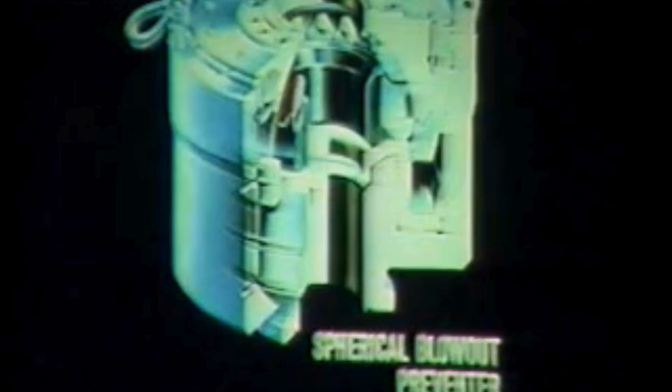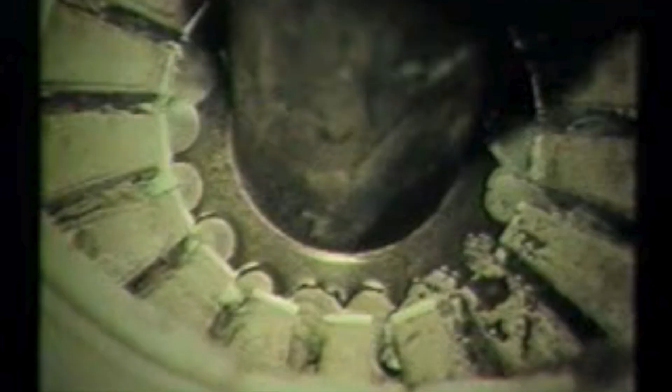The spherical blowout preventer, which is positioned at the top of the BOP stack, is the first preventer you should activate in an emergency. First developed by Shaffer in 1971, it is designed to stop a blowout under almost any circumstances. A spherical blowout preventer will seal automatically around any shape or size: kellys, drill pipe of all sizes, tool joints, drill collars, casing, wireline, even an open hole. The spherical BOP automatically adjusts its closure to fit whatever is in the hole.

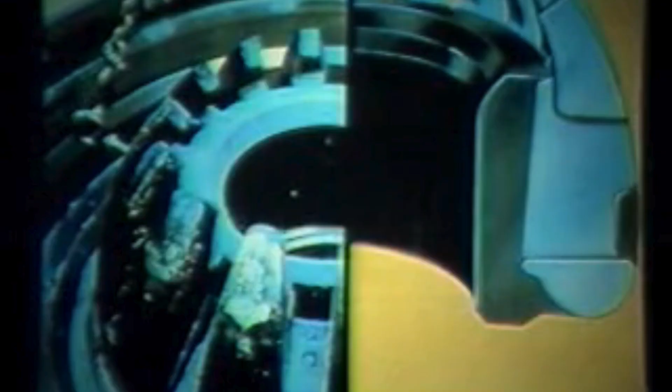The sealing element in a spherical blowout preventer resembles a large sphere-shaped jaw. The teeth in the jaw are individual steel reinforcing segments that form a skeleton for the circular rubber portion of the sealing element. The preventer is activated hydraulically.

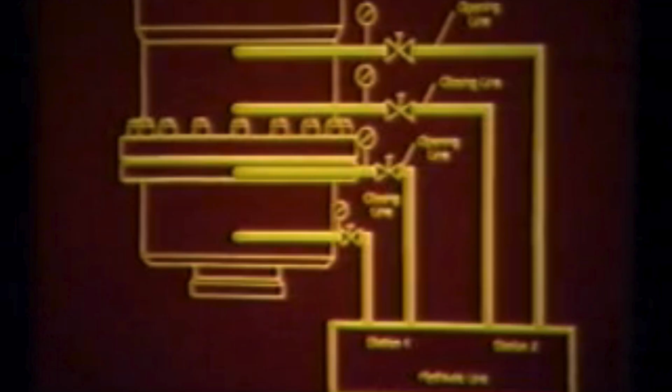When hydraulic fluid is pumped into a chamber below the piston, it forces the piston upward against the bottom of the sealing element. That pressure in turn causes the entire sealing element to move upward. Because the element is shaped like a sphere, the upward movement causes the sealing element and the steel segments to move into the well bore until they seal against the drill string, or, in the case of an open hole, against each other.

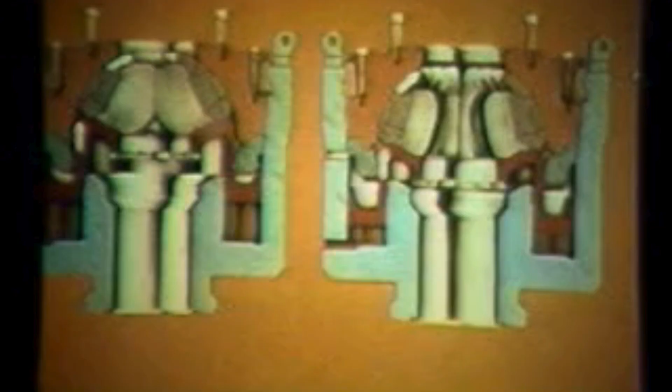N.L. Shaffer spherical blowout preventers are available with either bolted or wedge covers. The smaller BOPs and those with lower working pressures are built with bolted covers and are painted blue. Larger BOPs and those with higher working pressures are designed with wedge covers and are painted white. In bolted cover models, the upper housing fastens to the lower housing with studs and nuts. Wedge cover models fasten with locking segments and a locking ring.

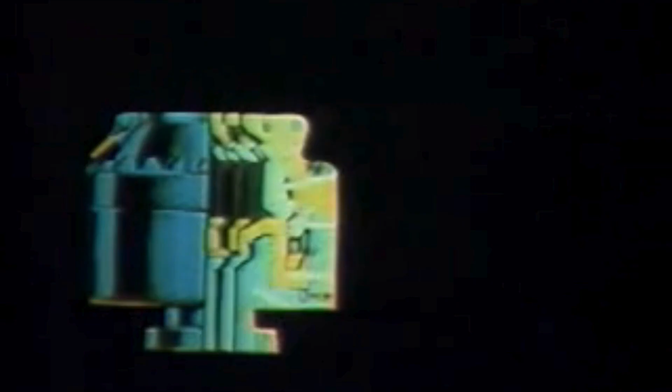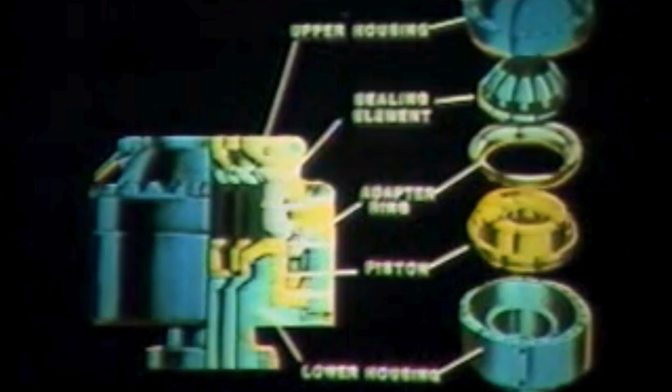The sealing elements for spherical blowout preventers are made in both natural and nitrile rubber for reliable operation in any well bore situation, including both water and oil-based mud, H2S, and low temperatures. The spherical preventer has just 5 major parts: the upper housing, the sealing element, the adapter ring, the piston, and the lower housing. A 3,000 psi hydraulic accumulator system, commonly used on drilling rigs, operates the spherical BOP.

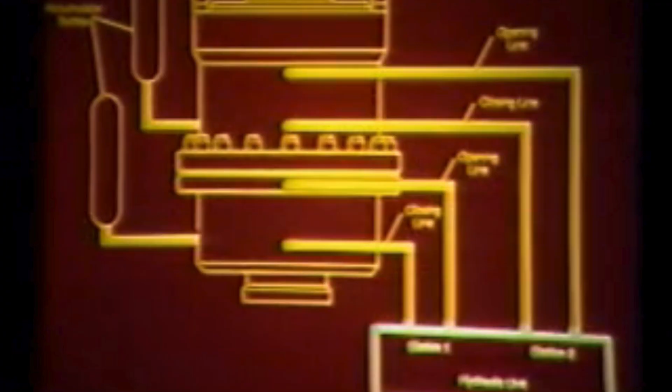The accumulator system should include hydraulic fluid opening and closing lines, a hydraulic regulator, and an accumulator bottle installed in the closing line. The hydraulic regulator is required to prevent the operating pressure from exceeding the recommended 1,500 psi closing pressure. It also can adjust the operating pressure for stripping or for closing on large diameter casing.

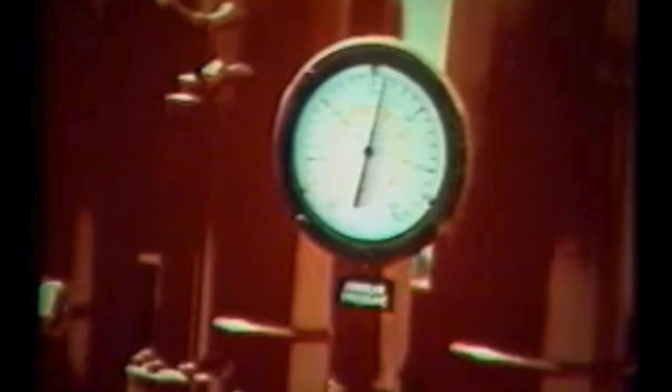The accumulator bottle serves to bleed off a small amount of hydraulic pressure to permit stripping operations when the BOP is closed. When the preventer is closing on an open hole, an operating pressure of 1,500 psi is sufficient to close it. Please refer to your operator's manual for recommended pressures when closing on casing.

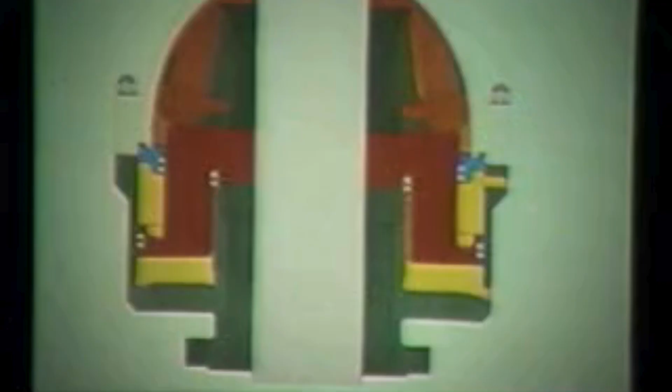When hydraulic fluid is pumped into the closing chamber of the blowout preventer, it puts pressure on the piston, which is located below the sealing element. The hydraulic pressure causes the piston to rise and push the sealing element upward. Because the sealing element is shaped like a sphere, the upward movement also produces an inward movement, which pushes the rubber sealing element and the steel teeth around the drill string.

The rubber sealing element, supported above by the steel teeth, controls wellbore pressure. When there is no pipe in the hole, the sealing element moves inward until it closes on itself to seal the open well bore. Well bore pressure even assists in maintaining the BOP seal, since it presses upward on the sealing element.

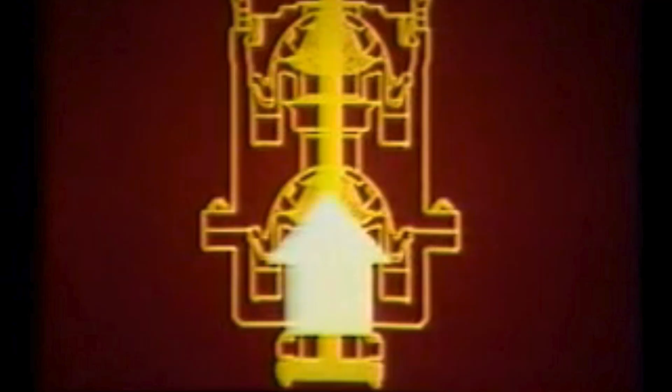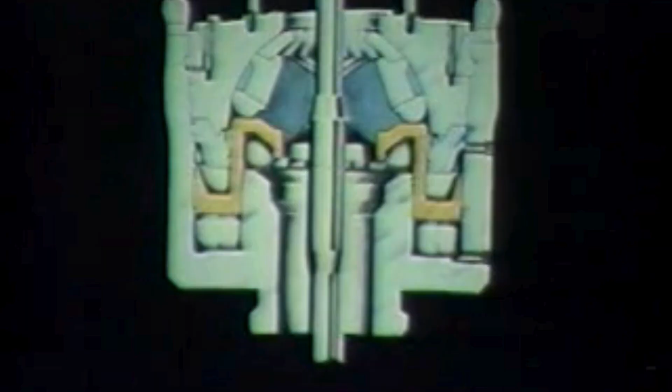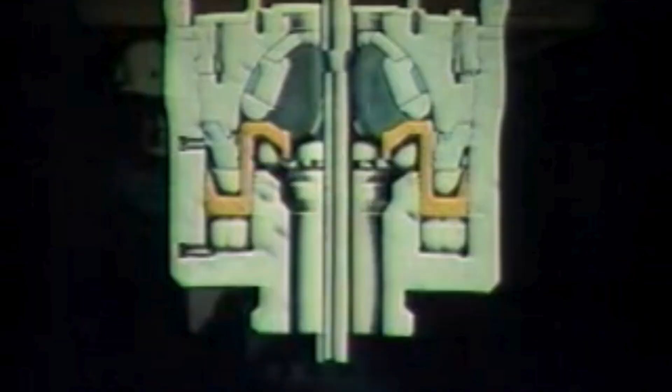Once activated, the blowout preventer remains closed until you apply hydraulic pressure to the opening hydraulic line. If stripping is required, slightly reduce the hydraulic pressure on the sealing element to allow the element to expand and contract slightly to permit tool joints to pass through it. The minimum pressure required to maintain a seal during stripping will vary, depending on the particular sealing element and its service history. The N.L. Shaffer Composite Catalog contains guidelines to determine initial closing pressures for stripping operations.

Before you install a spherical blowout preventer, you should clean, inspect, and test it. Most rig hands prefer to clean, inspect, and test the blowout preventer after each well to save installation time at the new well.

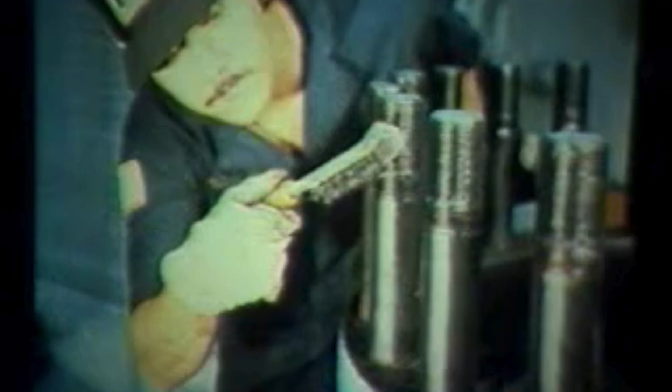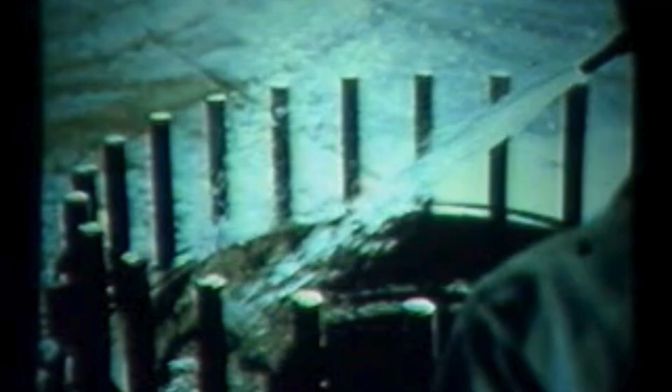First, clean the preventer thoroughly. Remove the upper housing if time permits. The disassembly procedure will be described later in this program. Use steam or high-pressure water to clean the exterior and interior surfaces, the upper housing, the bore areas, and the adapter ring. Use high-pressure water to clean the sealing element.

You also may use diesel fuel to clean the exterior, upper housing, locking ring, and adapter ring. However, diesel fuel should not be used to clean other parts of the BOP, since it is flammable and will damage rubber goods.

After you clean the BOP, blow it dry with compressed air if it is available. Then grease the dome and piston.

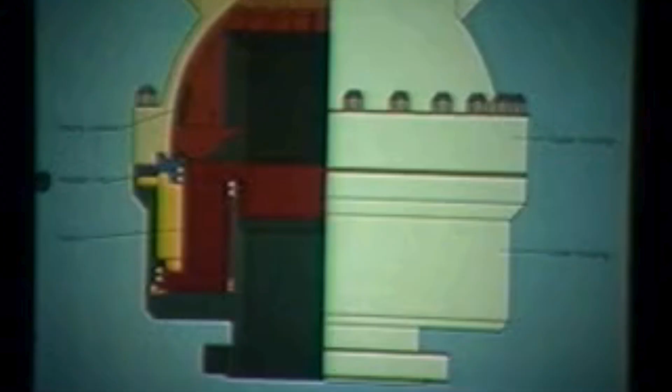Use water and a wire brush to clean the studs and/or nuts, the lifting eye threads, and the jack screw threads on wedge cover models. Lubricate the threads according to the instructions in your operator's manual.

Use an emery cloth to clean the ring groove and sealing areas. Lubricate the ring groove according to the instructions in your operator's manual.

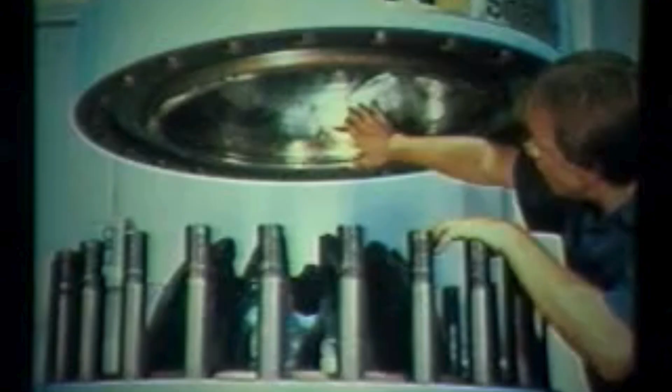Use sandpaper and an emery cloth to clean the spherical surface of each housing and to clean the piston. Wipe the seals and wear band clean with a damp cloth.

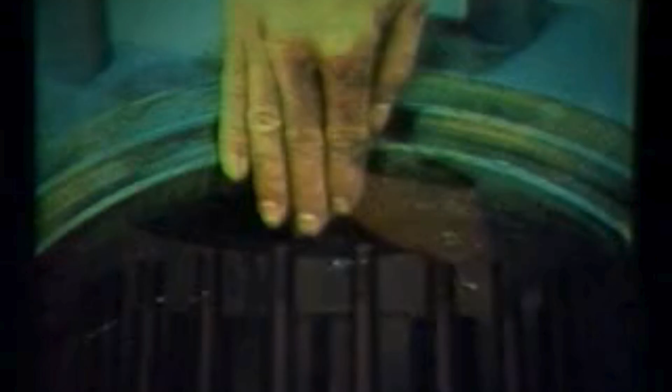Next, visually inspect the bore of the upper housing and run your hand around its surface to check for nicks, pits, and abrasions. If you find indentations of more than 1/8 of an inch, call your NL Shaffer service representative.

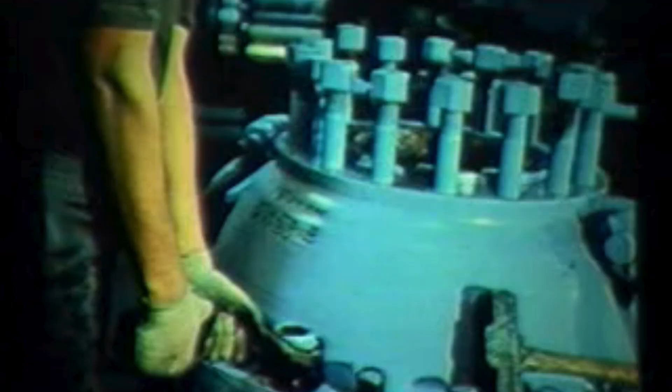Next, look through the bore of the upper housing to visually check the piston and lower housing bores for excessive wear. For a dual spherical, you will need to use an extension lamp or flashlight to see the intermediate and lower housing bores and piston bores.

If you find wear of more than 1/8 of an inch in the diameter of the bore, call your NL Shaffer service representative. Finally, inspect the sealing element for cracks, gouges, and splits.

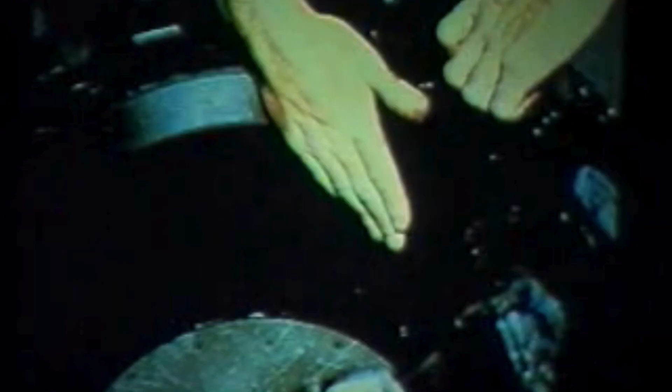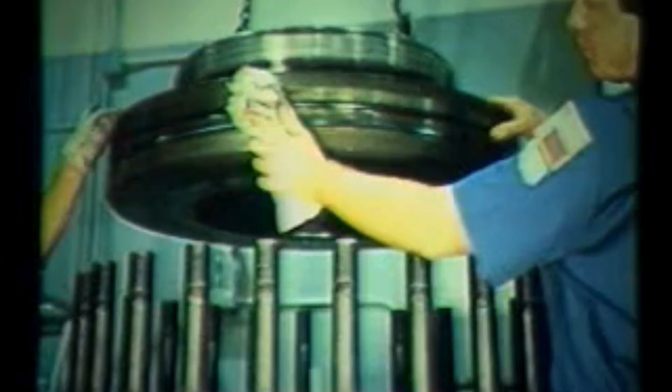If the element is worn, conduct a wellbore pressure test to see if the element leaks. The pressure test is described later in this program. Lubricate the outer surface of the sealing element to reduce wear and to prevent scoring of the upper housing.

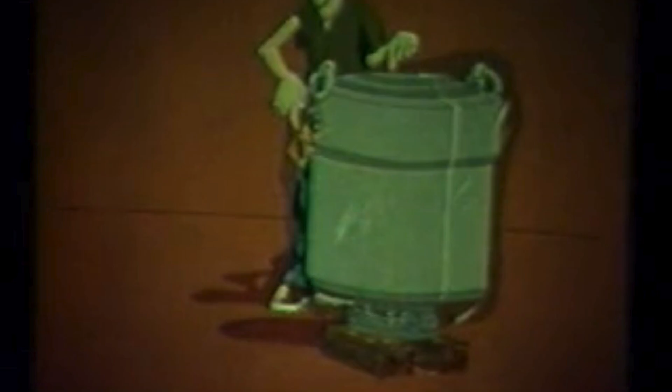If the BOP must be stored between wells, lubricate it, cover it with polyethylene, and elevate it on 2x4s to protect it from weather and corrosion.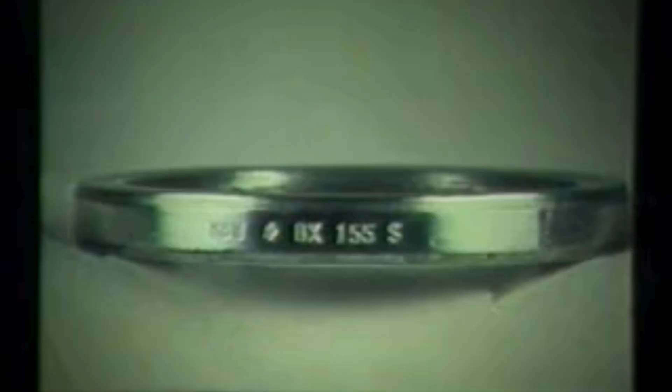To install the spherical preventer on flanged and studded connections, first inspect the stud threads and stud hole and install the ring gasket. Next, hoist the BOP using the lifting lugs and lifting shackles and install it on the mating flange.

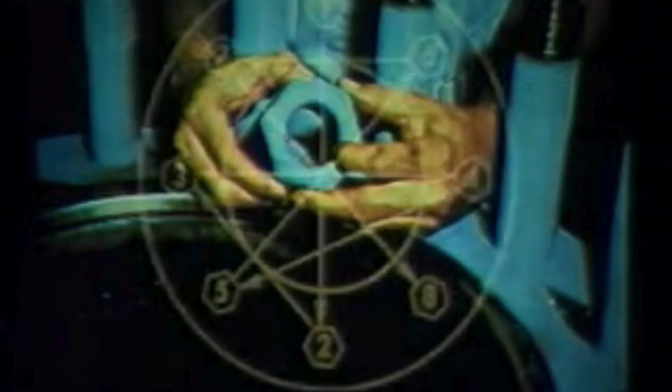Check the stud threads and stud holes again, then lubricate and install the studs and/or nuts in the alternating pattern illustrated in your operator's manual.

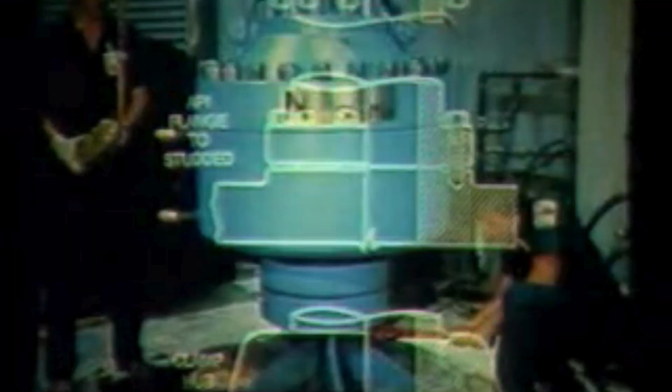To install the spherical BOP on hub connections, first install the ring gasket and lower the BOP as you would for flanged or studded connections.

Then clean and lubricate the raised surface of the hub, the internal surfaces of the hub clamp, the stud threads, and the nut faces according to API specifications.

When you assemble the clamp joint, be careful to maintain an equal distance between the two clamp halves. Tighten the studs alternately from one side to the other so the joint remains level.

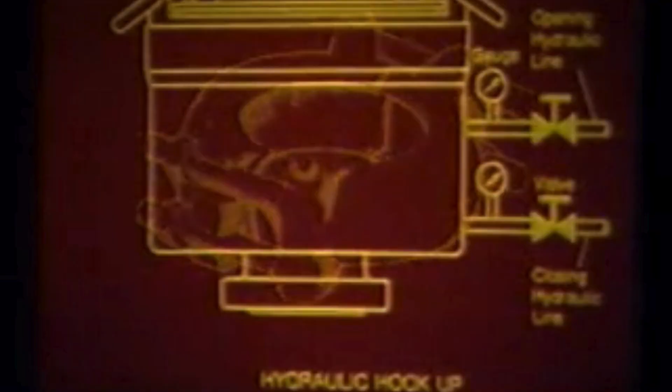After you've installed the spherical BOP, install an accumulator bottle in the closing line to accommodate stripping operations. Then connect the opening and closing hydraulic lines to the opening and closing ports of the blowout preventer.

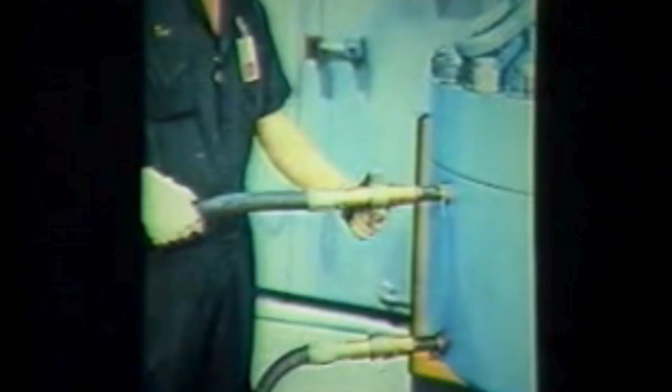Each spherical BOP is equipped with at least one port for the closing line and one port for the opening line. The opening port is always the top port, although some of the larger BOP models are built with additional hydraulic ports. Only 2 hydraulic connections, one opening, one closing, are necessary.

When the hydraulic hookup is complete, test for hydraulic pressure leaks by applying closing hydraulic pressure and checking for exterior leaks. Proper BOP operation and maintenance requires more than an initial inspection and correct installation.

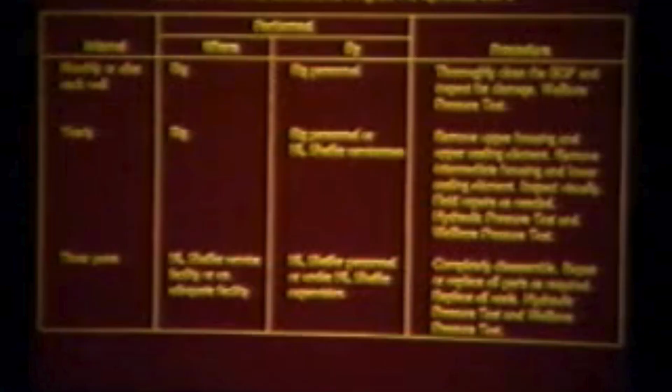N.L. Shaffer's preventative maintenance program outlined here can help you detect operating problems as they occur. By following this maintenance program, or the one designated by your company, you will be alerted to any problems with a blowout preventer and will have the opportunity to repair them so the preventer is always ready for emergency action.

The N.L. Shaffer preventative maintenance schedule is designed with flexibility to coincide with routine rig overhauls and normal rig moves between wells. Your responsibility in the N.L.

The program is to test the function of the sealing element on stationary drill pipe at least once a week to clear it of mud and cuttings. You also should clean the blowout preventer weekly. Once a month, you should conduct a visual inspection and well bore pressure test. The same inspection and pressure test sequence should be repeated whenever the BOP is moved to a new well. You also may have other responsibilities set by your company. You should keep records of your inspections and test results.

To begin the monthly visual inspection, check all nuts and studs for damaged threads. Next, visually inspect the upper and lower housing bores. Look for evidence of wear from the rotation of the drill pipe against the inner diameter of the preventer. If any nicks or gouges in the bore are more than 1/8 of an inch deep, call your NL Shaffer service representative.

The second part of the maintenance check, the well bore pressure test, enables you to check the operation of the sealing element and of the well bore pressure seals.

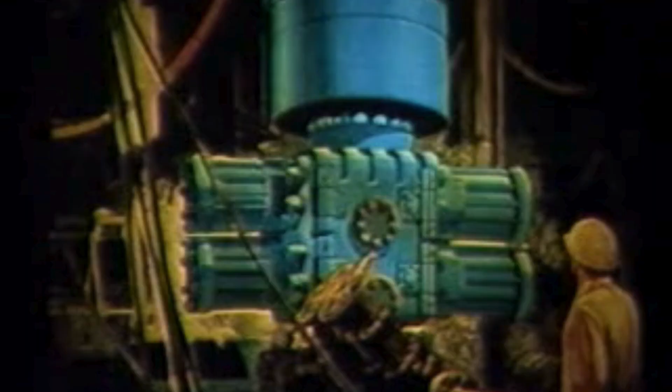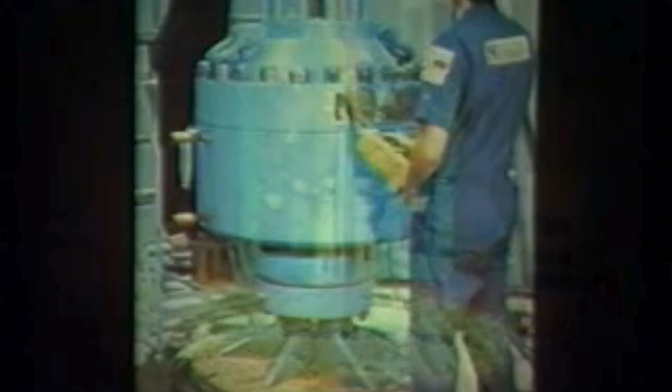To perform the test, you may leave the blowout preventer on the BOP stack, or you may install it on a test stump or on a blind flange. Next, install a test pipe or rod in the well bore or through the center of the preventer so the pipe is supported by the test stump or blind flange. If you are testing on a test stump or blind flange, anchor the test pipe on the box and pin, bolt it into the stump or flange. Anchoring is necessary to prevent simulated well pressure from forcing the test pipe upward out of the preventer.

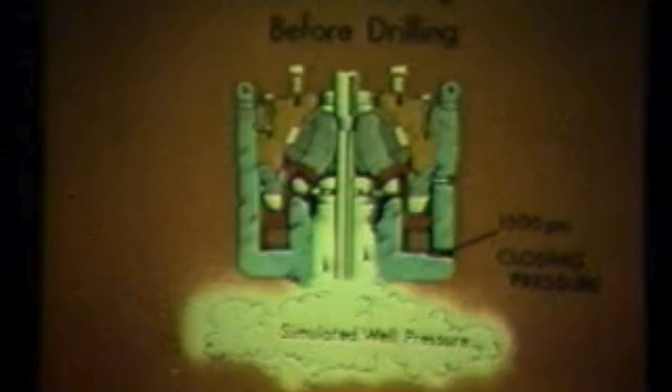If you are testing on the stack, use a threaded well bore plug as the test pipe anchor. Do not use the sealing element to anchor the foot of the test pipe. It will damage the rubber in the element. Finally, install a gauge and valve in the closing and opening hydraulic lines.

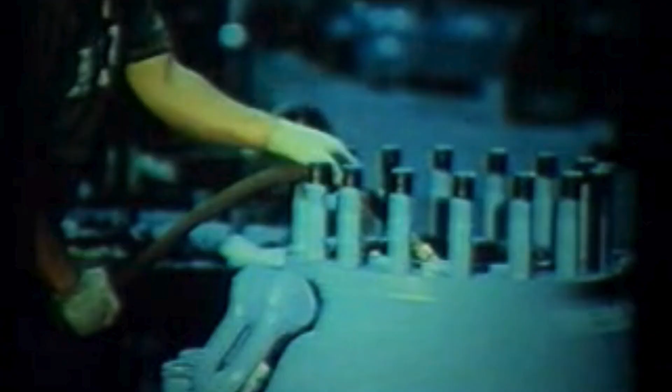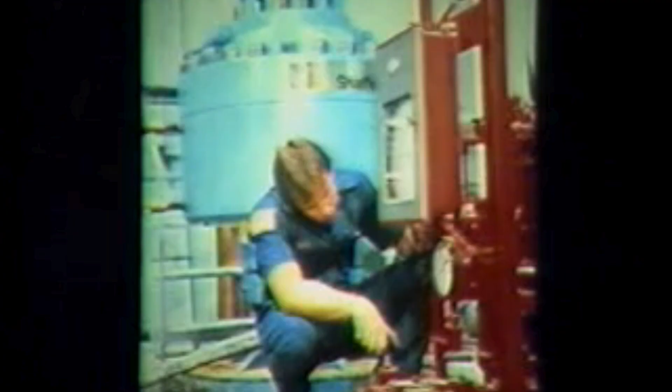To begin the test, fill the preventer with water. Apply 1500 psi closing hydraulic pressure to close the sealing element around the test pipe. Then pump the water with a test pump until the test pump gauge indicates that the pressure inside the BOP has reached its rated working pressure. Maintain the well bore pressure for 3 minutes while you watch the pressure gauge. The gauge should indicate that the well bore has reached the appropriate working pressure. It should remain at that reading for the full 3 minutes of the test.

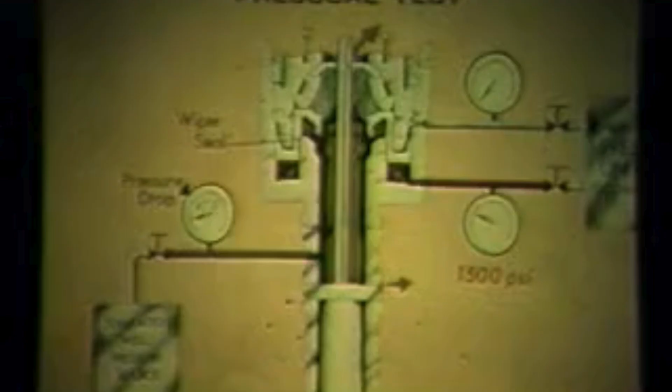If the well bore pressure remains constant for the full 3 minutes, the preventer has passed the pressure test and can be returned to service.

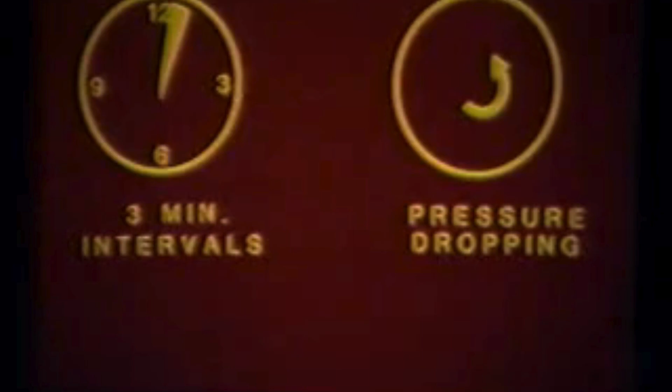If the gauge indicates a pressure drop during the first 3-minute holding period, the sealing element, a well bore pressure seal, or the ring gasket may be leaking. However, since the sealing element contains a large amount of rubber, what appears to be an indication of a leak may actually be caused by the initial movement of the rubber as it seals.

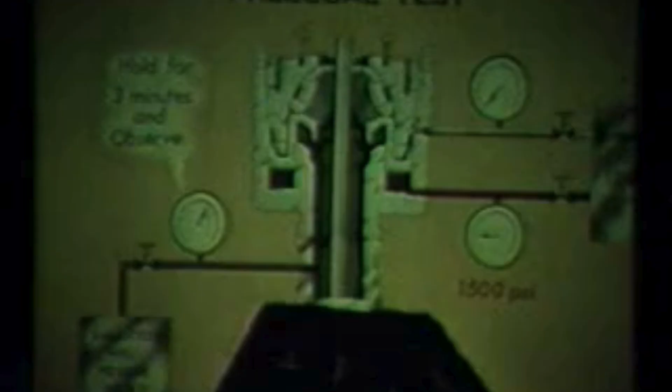To check that possibility, continue pumping in enough pressure to maintain the well bore pressure rating for 3 minutes. The 3 minutes of constant pressure will allow time for the rubber in the element to stabilize. At that point, maintain the appropriate well bore pressure for 3 minutes as you watch the well bore pressure gauge.

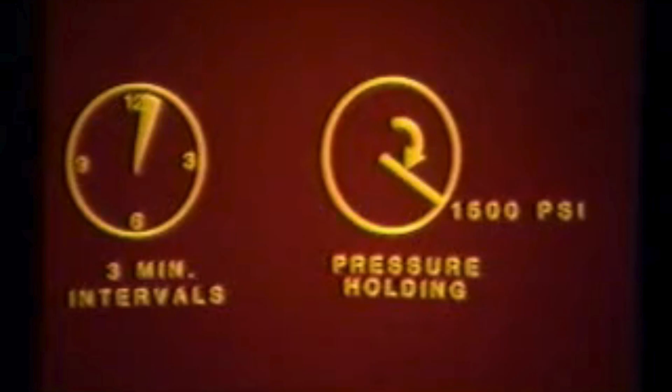If the pressure remains constant for the full 3 minutes, bleed the well bore pressure to 0 and apply opening hydraulic pressure to open the BOP. Then repeat the pressure test. If there is no well bore pressure drop in either holding period, the preventer has passed the pressure test and can be returned to service.

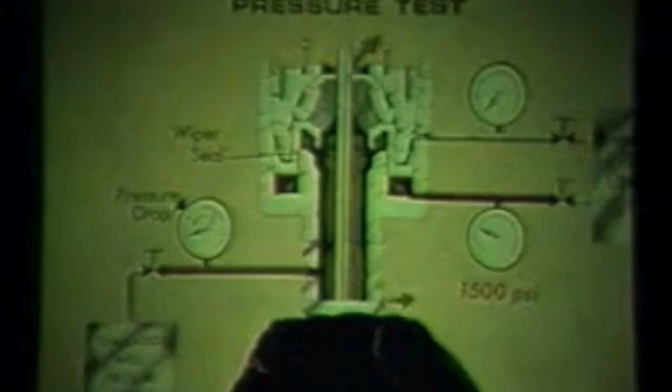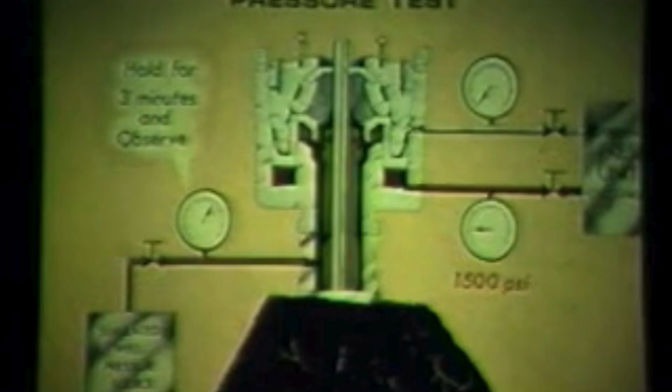If the pressure does not remain constant, continue pumping to hold the well bore pressure as you check for leaks. Look in the area around the test pipe, at the bottom connection, and in the well pressure piping system. If you find no leaks, stop pumping the well bore pressure and observe the pressure gauge for another 3 minutes. If the well pressure drops, the leak most likely is at one of the 3 well bore seals: the piston inner diameter upper seal, the adapter ring inner diameter upper seal, or the adapter ring top seal.

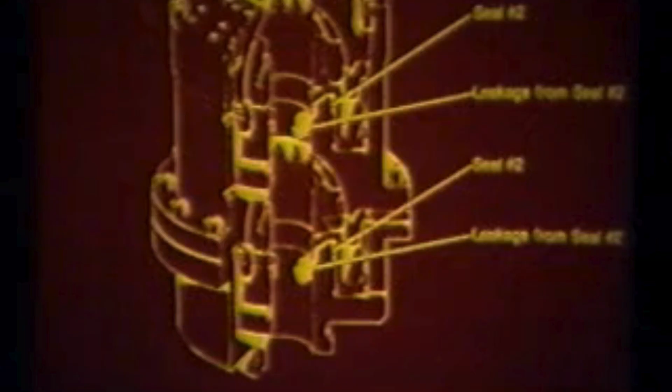Bleed the wellbore pressure to zero, apply opening hydraulic pressure to open the BOP, then either replace the seals or call your NL Shaffer service representative to replace them. After you replace the seals, conduct another wellbore pressure test. If the pressure still drops during the test, the leak may be at the sealing element.

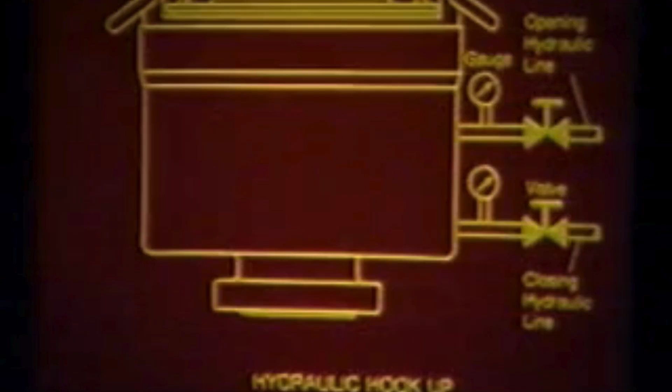To conduct a hydraulic pressure test, first install a gauge and a valve in both the closing and opening hydraulic lines. The gauge should be installed between the valve and the blowout preventer. Close and open the sealing element 3 times to clear all air from the system.

Then apply 1500 psi closing hydraulic pressure to close the sealing element. Wait 2 to 3 minutes for the rubber in the element to stabilize, then close the valve in the closing hydraulic line and watch the pressure gauge in the line for 3 minutes.

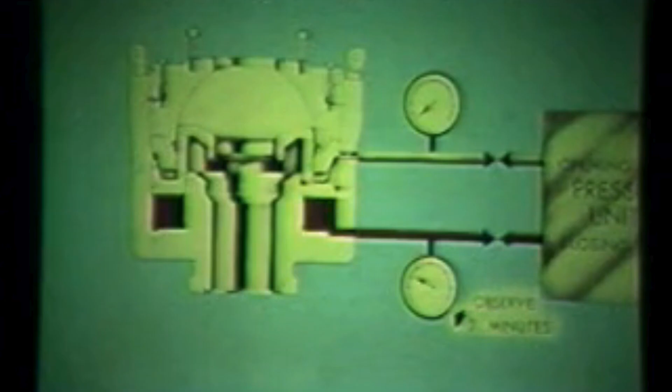If there is no pressure drop, the seals at the piston outer diameter and inner diameter are holding, and you may go on to test the opening line. If there is a pressure drop, the leak most likely is at the piston OD or ID seals, or both. A leak at the piston OD seal will produce fluid or pressure in the opening hydraulic chamber. A leak at the piston ID seal will be visible in the wellbore.

If the pressure test indicates seal leaks, call your NL service representative to replace the seals. If gauges are not available for the hydraulic lines, check for internal leaks past the piston by disconnecting the opening hydraulic line and watching for a brief oil flow from the opening outlet.

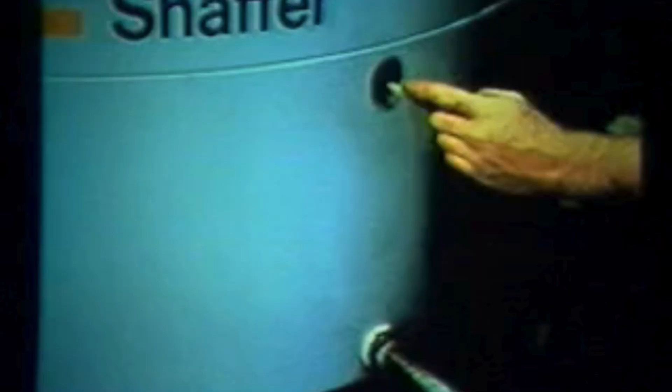The flow should stop quickly. If it continues to flow, it is an indication of a leak at the piston ID and/or OD seals. Call your NL service representative to replace the seals.

To test the opening line, repeat the closing line test sequence, applying opening pressure and closing the valve on the opening hydraulic line. If there is no pressure drop, hydraulic seals 3, 4, and 5 are holding. If there is a pressure drop, one or more of the 3 seals is leaking. Call your NL service representative to replace the seals.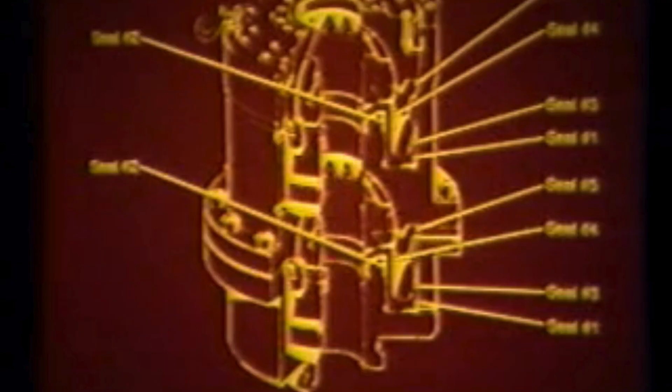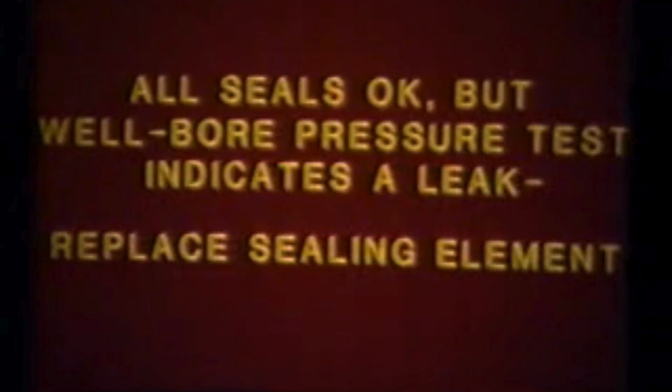If the hydraulic pressure test indicates that all hydraulic seals are holding, or if the seals have been replaced and tested, yet a repeat of the wellbore pressure test still indicates a leak, you should replace the sealing element. First, bleed, disconnect, and vent the hydraulic chambers.

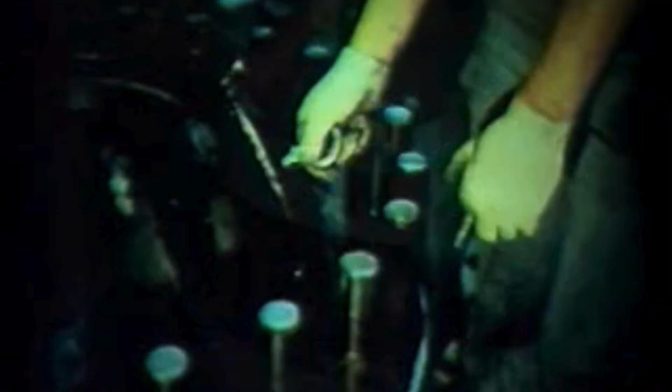To remove the sealing element from bolted cover models, remove the stud nuts that hold the upper housing and lift off the upper housing with a hoist. Screw 2 eye bolts into the sealing element and lift it out.

Wash out the interior of the BOP and blow it dry with compressed air. The adapter ring seals the piston and the hydraulic chambers from mud, cuttings, and wash water. Next, clean and lubricate the lower housing studs and nuts.

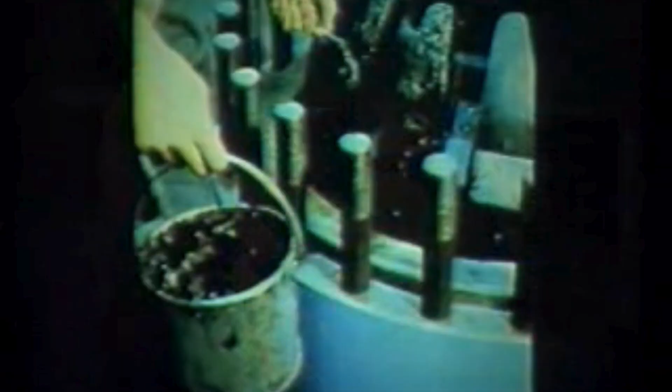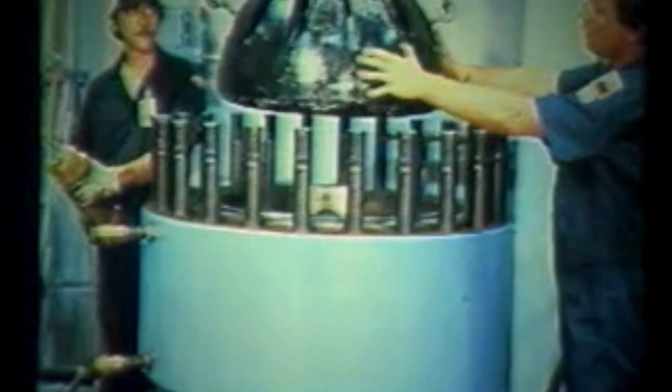Lubricate the outer surfaces of the steel segments of the new sealing element and the upper housing to reduce sealing element wear and to prevent scoring of the upper housing. Install the new sealing element on top of the piston and install the upper housing and stud nuts.

To remove the sealing element from wedge cover models, remove the locking ring nuts, then screw 2 eye bolts into the locking ring and lift off with a hoist. If it is difficult to remove the locking ring, install 6 jack screws in the ring to raise it, then lift it using the eye bolts.

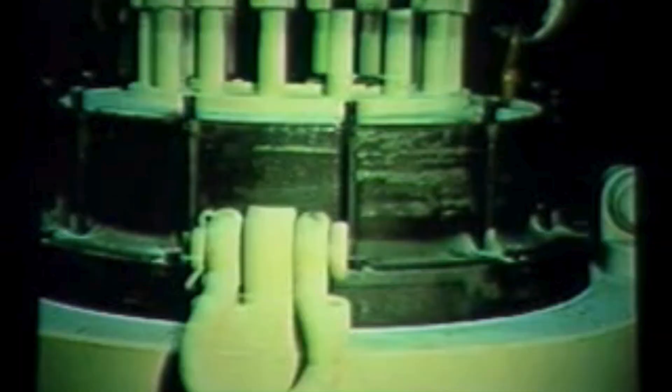Lift out the locking segments by hand. If they are difficult to remove, use a sledgehammer to drive them toward the center of the BOP. Screw 2 eye bolts into the upper housing, lift it out, then screw 2 eye bolts into the sealing element and lift it out.

Lubricate the outer surfaces of the steel segments of the new sealing element, the upper housing, and the locking segments. Install the new sealing element on top of the piston. Lower the upper housing. Set the locking segments in place on the upper housing, pushing them out so the locking ring can be lowered into place.

Install eye bolts in the locking ring, lubricate the ring, and lower it into place over the studs. And tighten the nuts onto the locking studs.